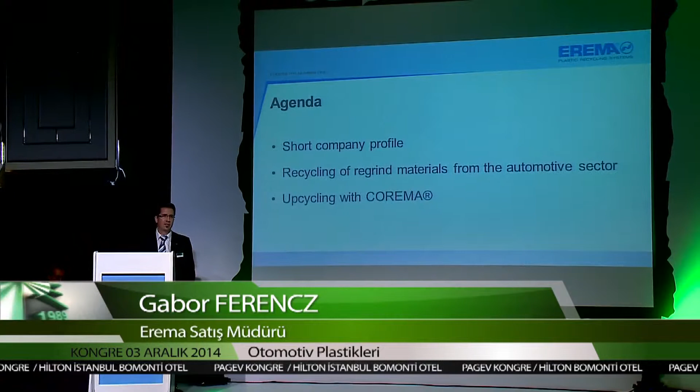First of all, I would like to thank the Pagev organization for this perfect event and for the possibility to give you a speech about Erema. For today, I prepared three topics. First, I would like to introduce shortly the company Erema, and then I will continue with the recycling of regrind materials from the automotive sector. The third topic is upcycling with COREMA.

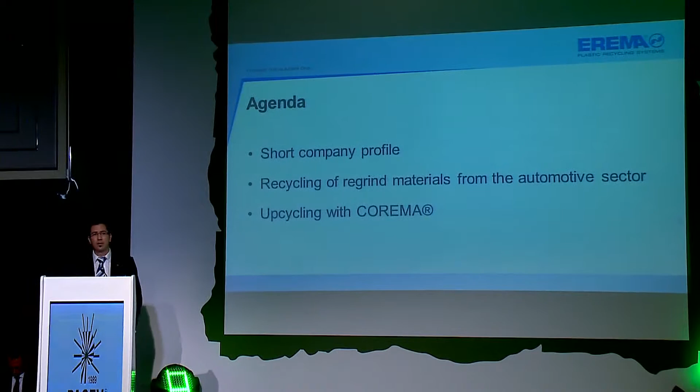This is a relatively new solution from my colleague, Mr. Obermeier. He's product manager at Erema, and it is a really interesting solution.

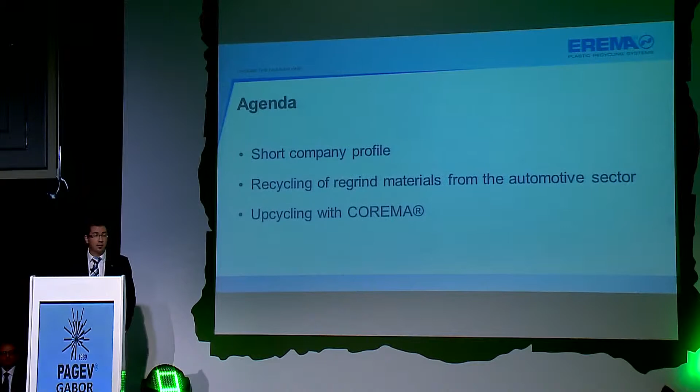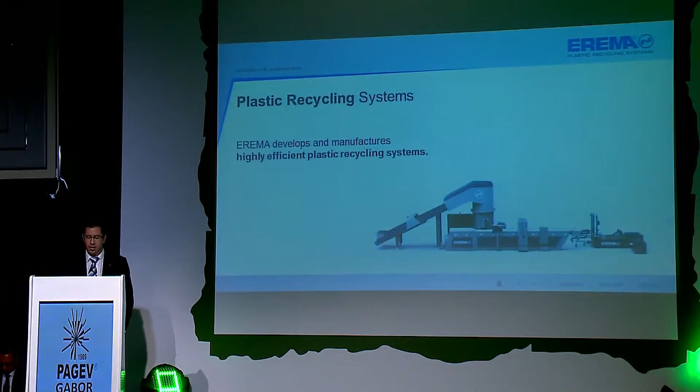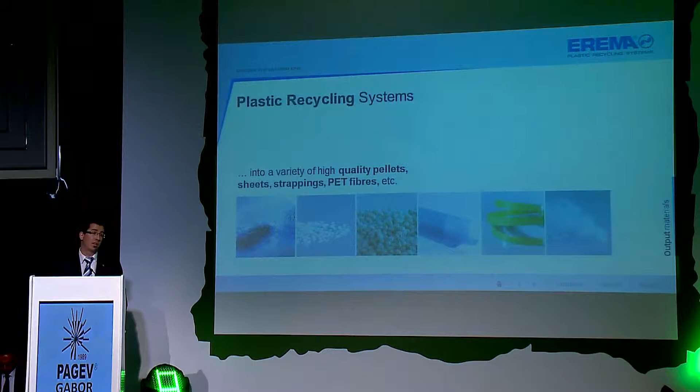Erema is market leader in the production and development of plastic recycling systems, and you see on the photo our latest technology. With this system you can convert industrial waste, in-house plastic waste, post-consumer waste, or PET bottles into high-quality pellets, the final product. We also have the possibility to go with the filtered melt directly into an inline application, such as an inline sheet, strapping, or fiber production. With this inline technology, the customer saves a lot of energy and production cost, and increases productivity.

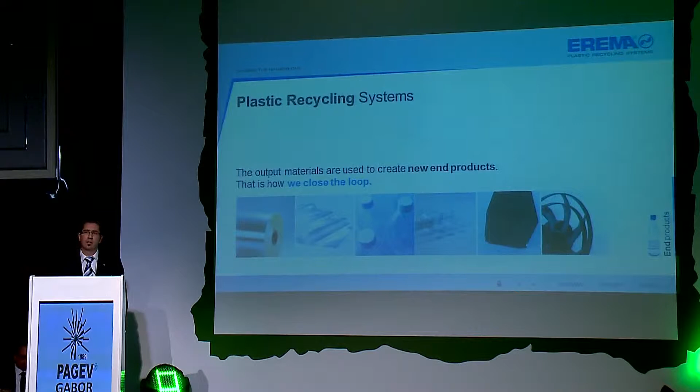The output can be really different. I would like to talk today a little bit more deeply about automotive parts. We have samples outside in the coffee area. You can take the chance to see these car battery cases, the pellets, and the input material. This is the way how we close the loop.

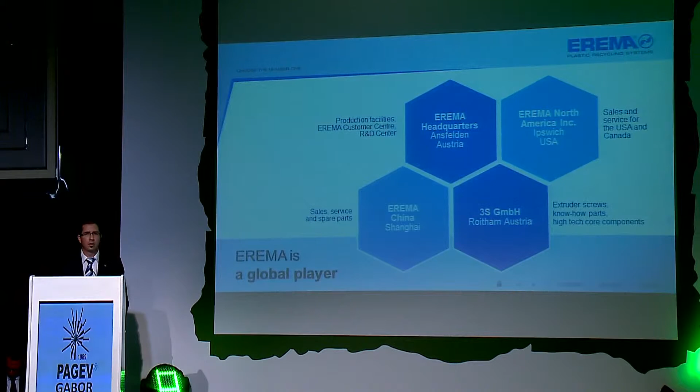International activities, export is our main business, and therefore we have 50 local sales representatives. Here in Turkey, in Istanbul, we are working with Mr. Rizo Anastas. If you are considering buying a recycling solution, please get in contact with him or directly with us. By the way, tomorrow we will start with the exhibition at Plastik Eurasia. If you are at the exhibition, please visit our booth for more detailed information.

Erema is the market leader in the recycling business. The turnover in the last fiscal year was 117 million euros. We produce every year more than 200 to 250 recycling plants, and we have sold already more than 4,000 machines over the world. Only in Turkey we have more than 55 recycling lines, and the customer feedback is really positive.

Our focus is innovation, technological innovation, and we want to create customer benefits and advantages. Our last product generation was launched at K-Show 2013. This is not only a new design of a machine, it is a new core technology to save more energy, reduce the cost for users, and have more stability in production, easier operation, and higher and constant throughput. All these benefits are in the INTAREMA, the best recycling solution currently on the market.

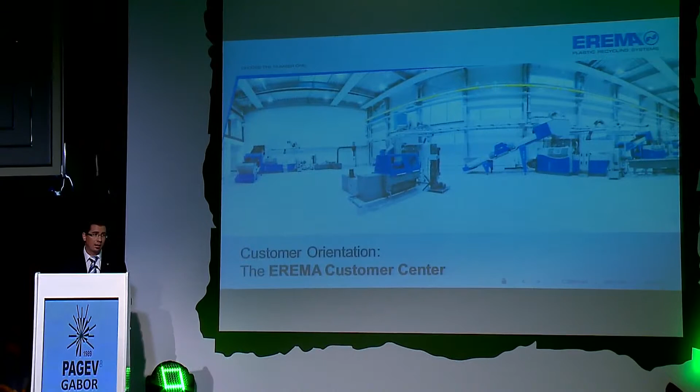If you are considering buying a solution, you can have a test run before you take a decision in our large customer center. Here in this customer center there are 8 recycling lines for our customers, and you can take part in the production process. You can take back the pellet to make further tests in your production, and we have a small cast and blow film line to make analysis immediately after the recycling process on the final product.

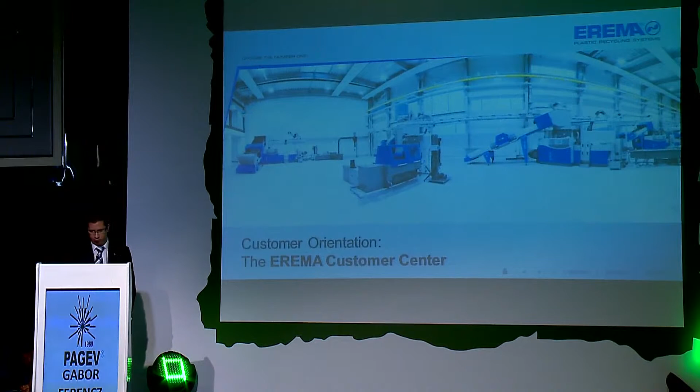Okay, so let's check it. Some technical problems, but this is not a big issue.

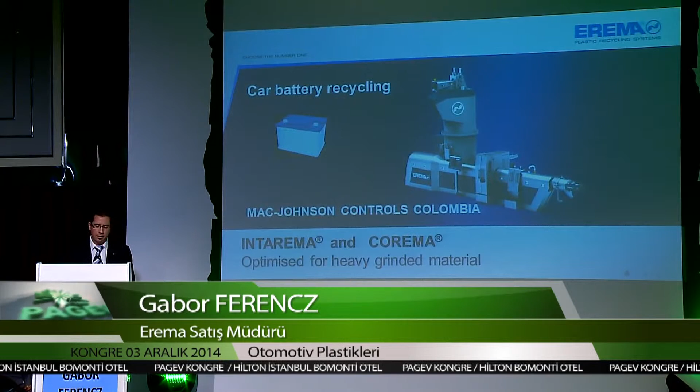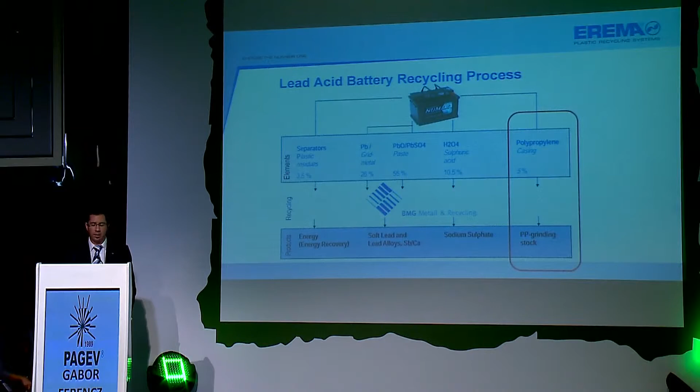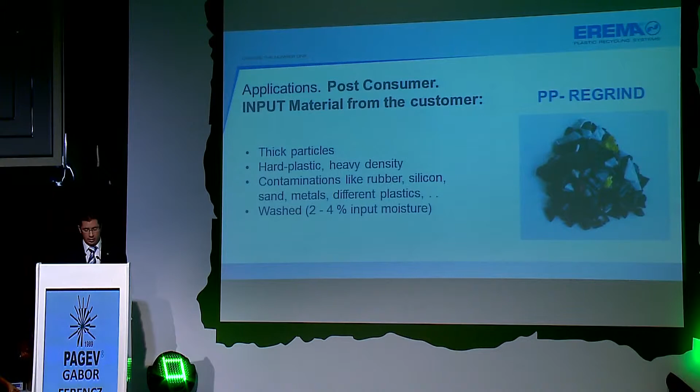The next chart is this nice project with Johnson Controls and MAC Batteries Colombia. The main goal in this project was to recycle the polypropylene battery casing. If we talk about battery recycling, it is a complicated issue because you have to separate metal, acid, and plastic. The polypropylene percentage is only a small amount, about 5%, and it has to be washed and cleaned before we feed it into the recycling system. This is a hard plastic, and after the washing process it is already contaminated with small sand and metal parts, so it's really important to have good filtration. The input moisture content is also a big challenge, needing to remove the residual 4% of moisture. If we talk about 100 kilograms of input material, this means approximately 4 liters of water.

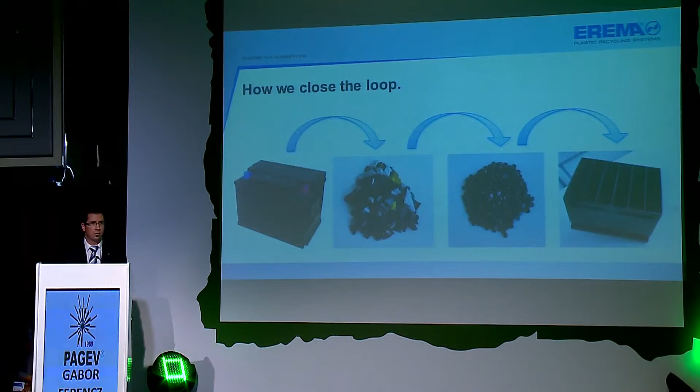So this picture shows you how we close the loop. The used battery cases will be collected, pre-cut, and washed, and this material will be converted in the Erema recycling plant into high-quality pellets, and the pellets can be reused for the new production of batteries.

We developed our cutter compactor system further to get, for regrind material, a new precondition unit. This unit is responsible for different jobs like homogenization, heating, drying, buffering, and dosing, and all these jobs are done at the same time. I don't want to go more into detail — you have the possibility to discuss with us after the presentation.

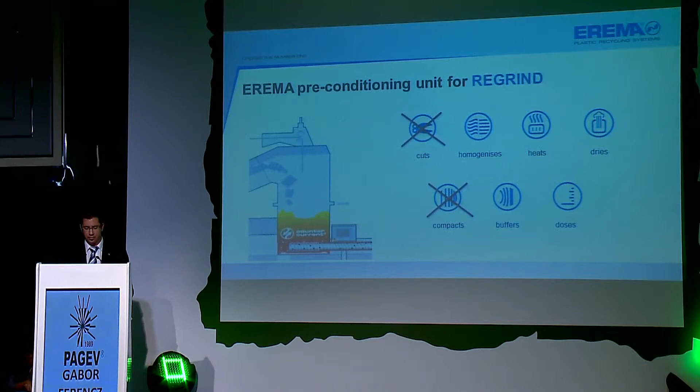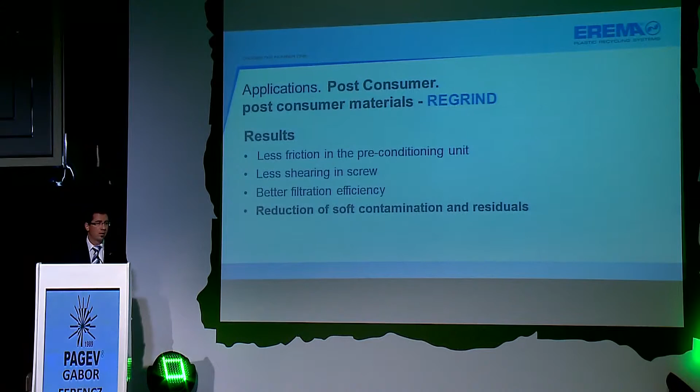With this unit, we achieved a lot of benefits. The result was less friction in the preconditioning unit, less shearing in the screw. This results in a shorter, smoother screw design, better filtration efficiency, and reduction of soft contaminations. At the end of the day, you get a better end product.

Okay, this was my part, and now I would like to hand over to Mr. Obermeier. He is our product manager for the Erema solution. Thank you.

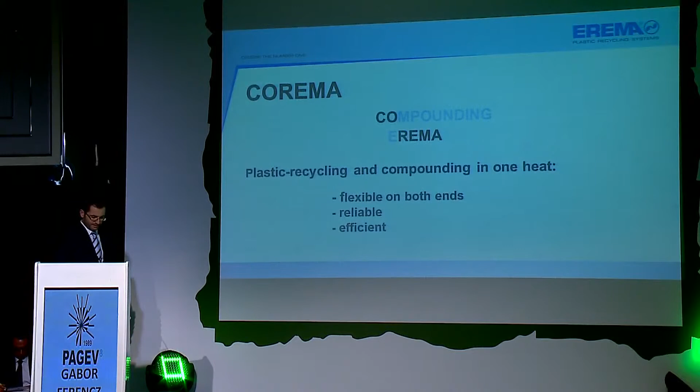Thank you, Gabor. Very short on this product line, which we call COREMA, which is about a plastic recycling system for compounding and recycling in one heat, in one step, which offers and provides flexibility on both ends of the process. It is reliable and very efficient. In principle, it is a combination of two extrusion systems.

The first part is the Erema standard recycling system, a robust system, a single screw extruder connected to a cutter compactor. The cutter compactor is in principle a drum with a rotating disc on the ground for feeding the single screw. And the single screw is melting up, building up the pressure for the filtration.

Then we have a melt pump. The melt pump is the dosing system for the connected twin screw. The twin screw is coming from Coperion, which is the partner for this product for Erema. And finally, the pelletizing system.

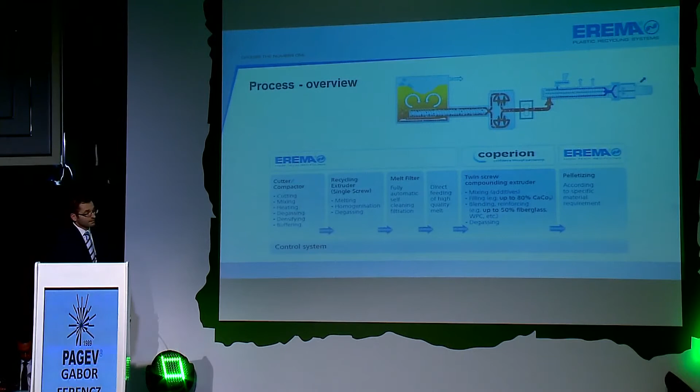The flexibility on both ends. The first end is the cutter compactor. We can feed there, it's a multifunctional feeding unit. Gabor, what can we feed there? So, more or less everything. Thank you.

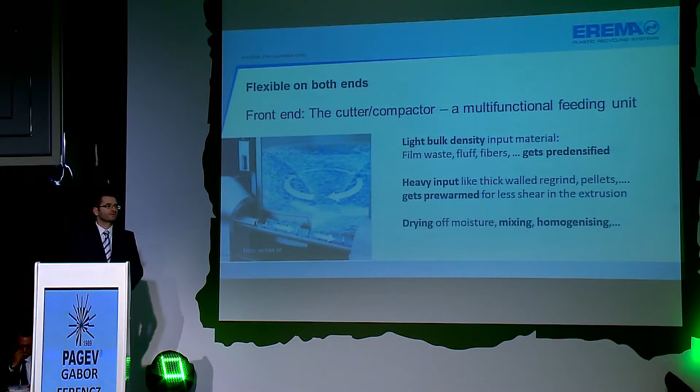Well, everything is maybe a bit strong, but we can feed there really all the plastics that are used in packaging, in the automotive industry. Of course, all the different polymers, but also depending on the bulk density, we can feed there film with very light bulk density, and we can also feed heavy material like regrind, which I think is more interesting in the automotive industry.

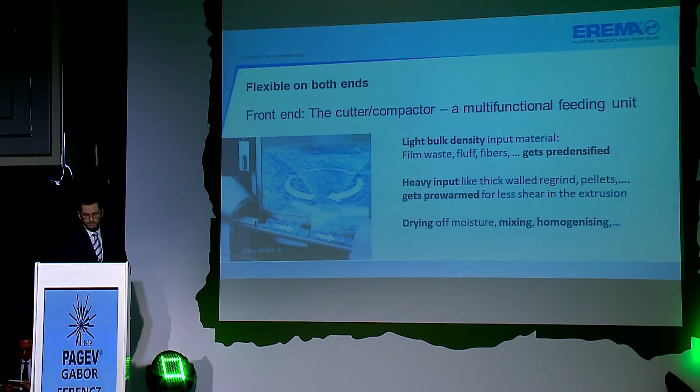The middle section is the filtration unit. We come with a melt, which is melted up very gently, so there is very little shear in the material, so the contaminations remain big. Then we come to the filtration unit where we can filter out the contaminations. As an example, we did a trial with a customer from Bulgaria with ABS regrind, and there were some polyamide pieces in it, and we could filter them out.

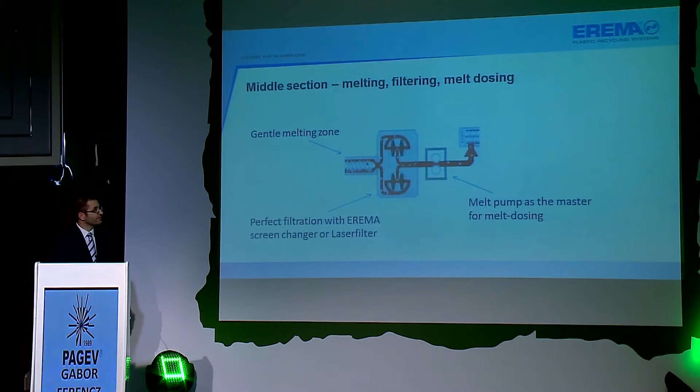We filter it here in this section, and we bring a well-prepared melt to the twin screw, to the compounding section. This section, of course, is very flexible because, as you might know, twin screw extruders are built up piece by piece, so we can really set up the equipment according to the requirements of the process. What we can do there is, of course, a wide field. We can blend materials, fill them with mineral fillers, enhance mechanical properties, add fibers, set the color, we can do really everything the compounding equipment provides.

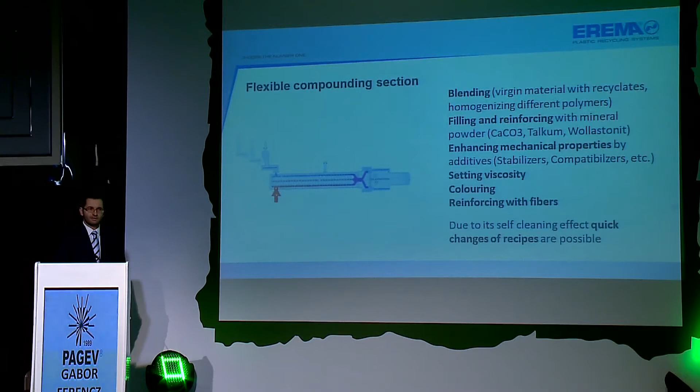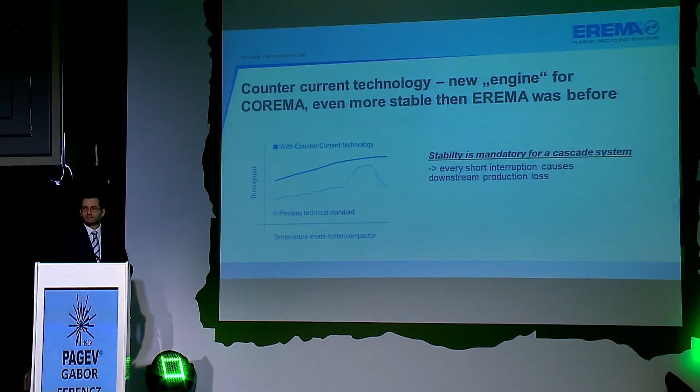Such a cascade system, of course, needs a lot of stability. With the new countercurrent technology, which my colleague explained shortly, which is in the first part of the process, we now have even better stability than we had before. And it is also energy saving.

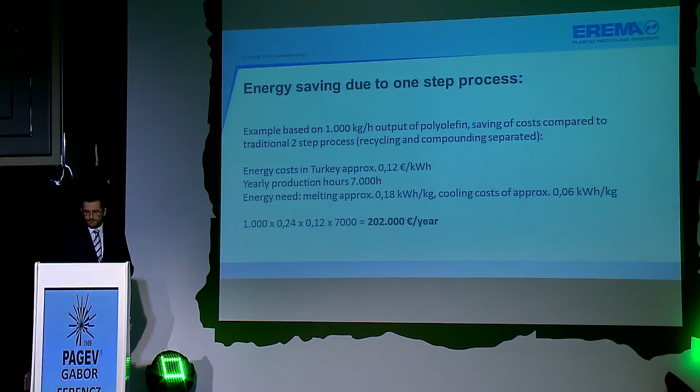As an example, if we calculate for a machine with 1,000 kilogram output an hour, and compare it to a standard process where recycling and compounding are done in two separate steps, starting, as we are here in Turkey, with energy costs of 0.12 euro per kilowatt hour, and a yearly production of roughly 7,000 hours, and we speak about, as an example, PP, we calculate something for melting up, and also a little bit for cooling down, we end up with a cost saving of roughly 200,000 euros per year.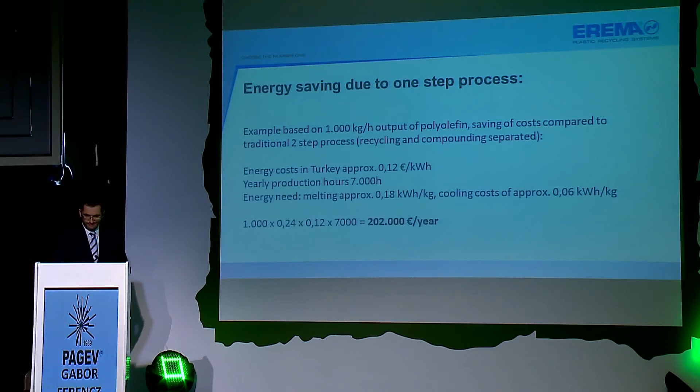Takes a bit long to change the slides.

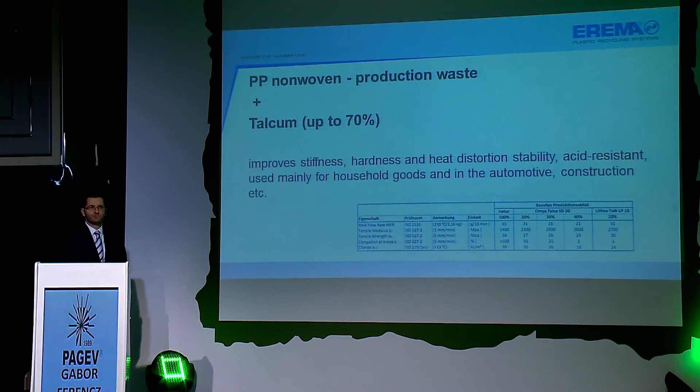Just some further examples of what we already did in our laboratory. As an example, PP non-woven was the input material, and we filled it up with talcum, like PP TD20, which is very commonly used in the automotive sector. Another example out of automotive: the input material on our side was the waste material from airbag production out of polyamide, and we filled it up with fiberglass.